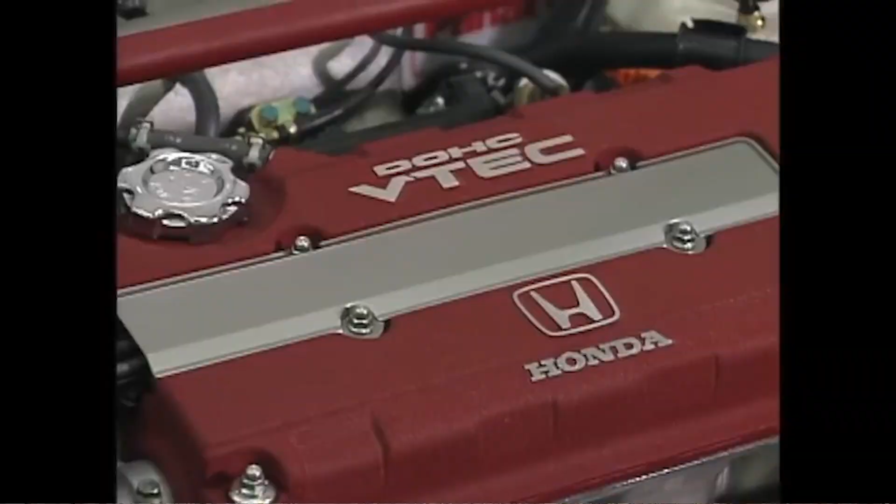The B16B engine is very different from the engine it's based on, the B16A, which is available on the SI and the SIR model.

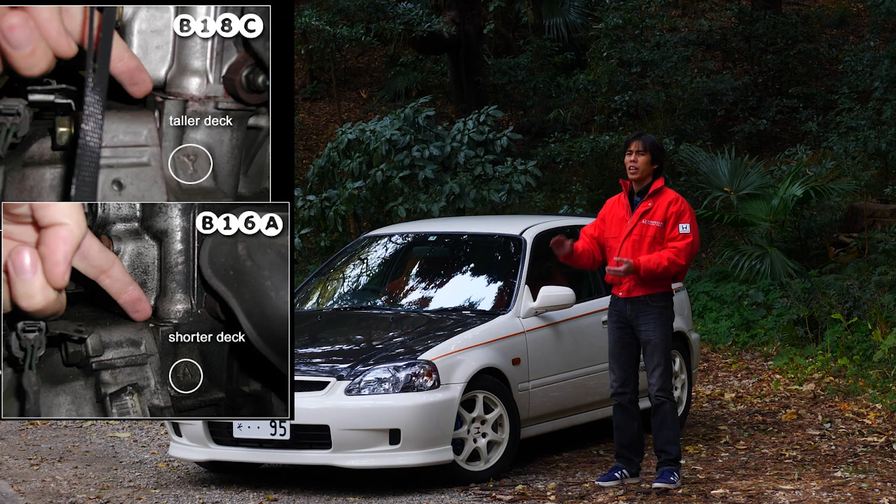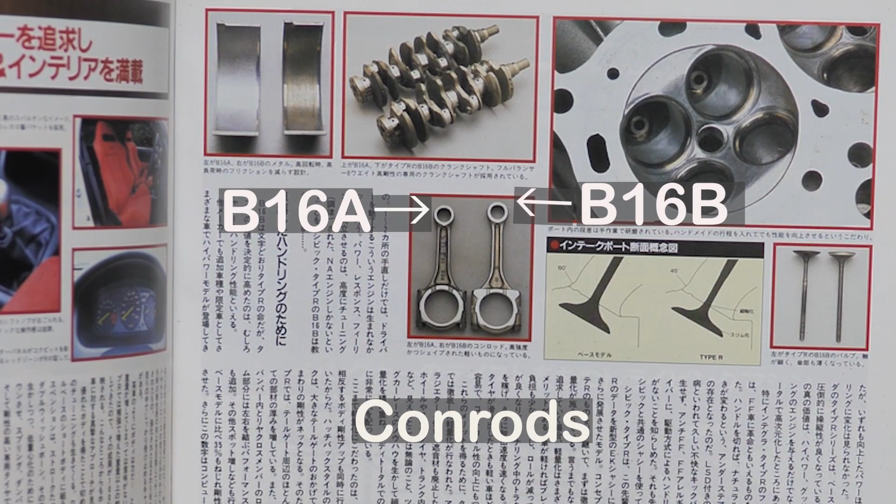The B16B had a high block, taken from the Integra Type R's 1.8-litre B18C, and then sort of de-stroked with longer con rods to make it 1.6 litres. The reason for doing this is having longer con rods with the same stroke actually makes it smoother, with less vibrations.

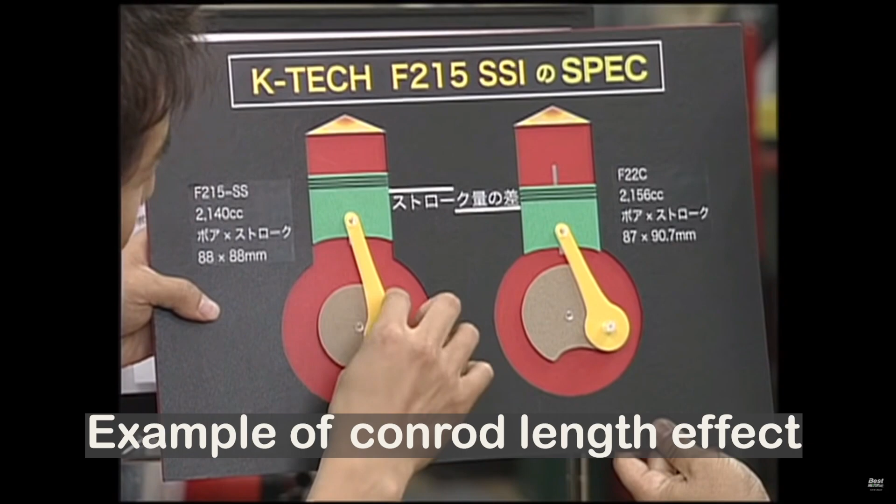Rev capability of this engine can actually go up to about 9,000, although from the factory it's set at about 8,600, which is more than enough. A lot of the power appears in the last 2,000 RPM.

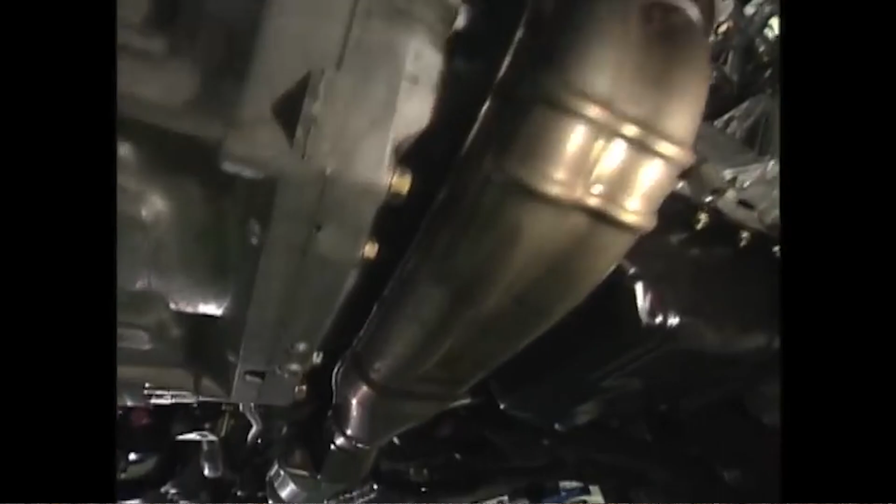But the factory exhaust manifold and the whole exhaust system, and the intakes, are also very different from the SIR model. So a lot of these changes make this engine really bespoke.

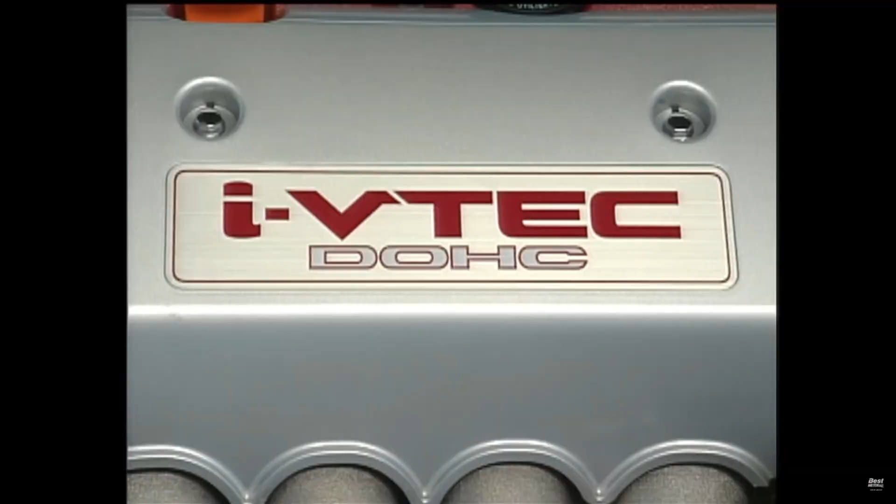It's also the last version of the B-series engines before Honda switched over to the K20A in the DC5 and the EP3. So we're going to be talking a little bit about the technical specifications of the stock car before moving on to why Spoon has chosen to keep more or less the same specs but with an improvement using their parts. So let's have a look at the engine.

Of course, this is the Spoon carbon fiber bonnet, which is very light, 7 kilograms lighter than the stock metal full iron one. In fact, very, very light. Can lift it with one finger, but it's not as light as some other manufacturers' ones, like maybe Varis.

And the reason is it's been constructed with enough rigidity. As you can see here, the top is carbon fiber, but the underside, the ribs, follows the design of the original stock piece, and it's FRP. This is light enough to make an impact on the weight over the front wheels, but it doesn't really need any bonnet pins.

So you can still use this and it'll appear like a normal car. In fact, for those who don't want that carbon fiber look, you can actually paint it to the body color, which is what I would do with the thing.

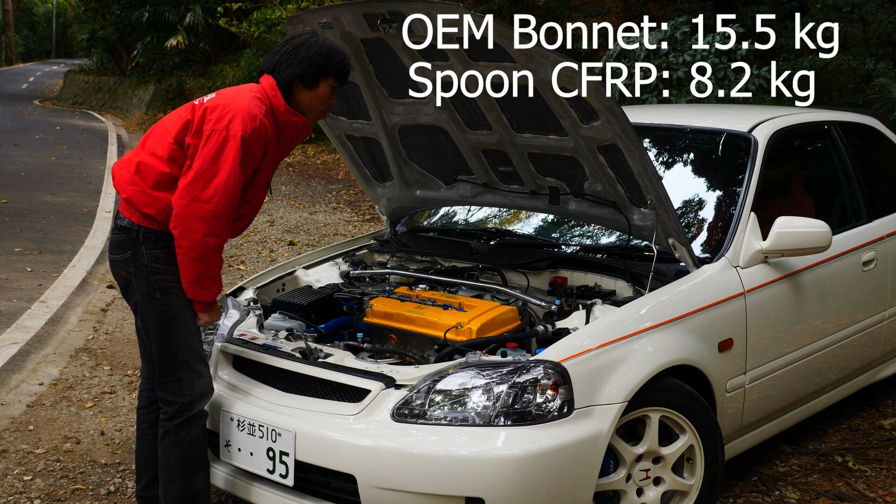So here we have the yellow head, the B16B engine. You can see here DOHC VTEC, which was quite a big thing. In the 90s, it was a thing to put all these technical specs of the car, the 16 valve, 20 valve, DOHC, and of course VTEC. And what is VTEC? Let's explain once more.

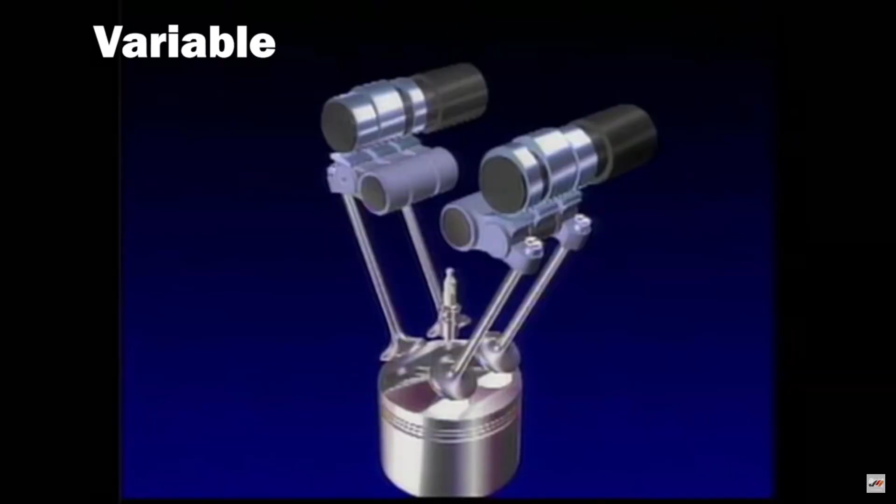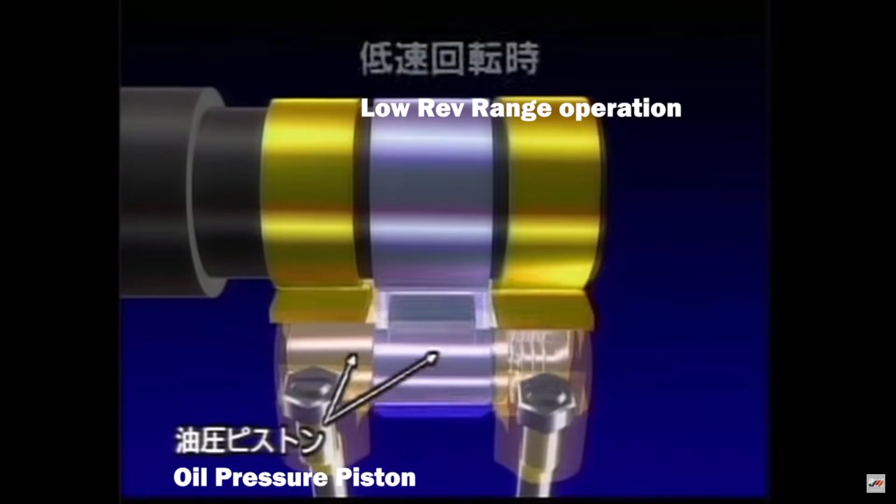Variable valve timing and lift electronic control. This was a revolutionary cam switching technology that Honda patented, coming up with the first DA6 Integra XSI in Japan, followed by the EF9, and then also used it on the C30A in the NSX.

The B16B is the last iteration of the older school VTEC engines before the switch over to iVTEC with the DC5. Users and fans have commented at how the older B series engines, as also the H engines, not forgetting the very, very good F20C in the S2000, because it doesn't have variable cam phasing on the intake shaft, it's just a really on-off kind of Dr. Jekyll and Hyde kind of feel.

It just has linear torque, and after 6,000 or so RPM, it switches to the high cams, and there's just a huge rush of power, just sort of 'VTEC kicked in yo' as a lot of fans would like to say. But it's not really VTEC kicked in, it's more of a switching from the low cam profile to the high cam profile.

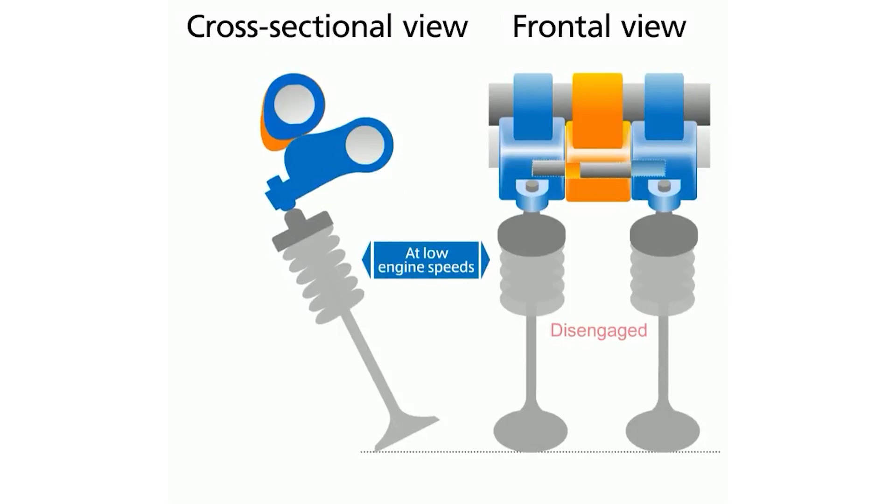Now what this actually entails is that the intake and exhaust valve lift is longer, the duration is longer, to allow more valve overlap. And that's very important because we want the intake air to be overlapped slightly with the exhaust going out.

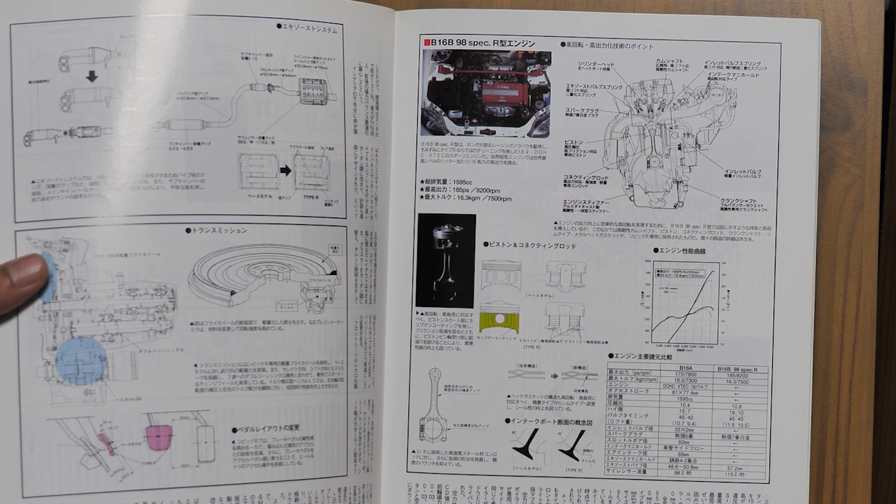And those who know about NA engines, the only way to produce more power is to rev higher and breathe smoother. Now with normal engines, the higher revolutions you go, all the valve train and everything's moving really, really fast. If the cam timing and therefore the valve movement and duration stays the same, you can't put in a lot of air. It's like an athlete - if you're running and you want to increase your pace, to get more air into your body and create more mechanical or physical power, you need to enlarge your lungs.

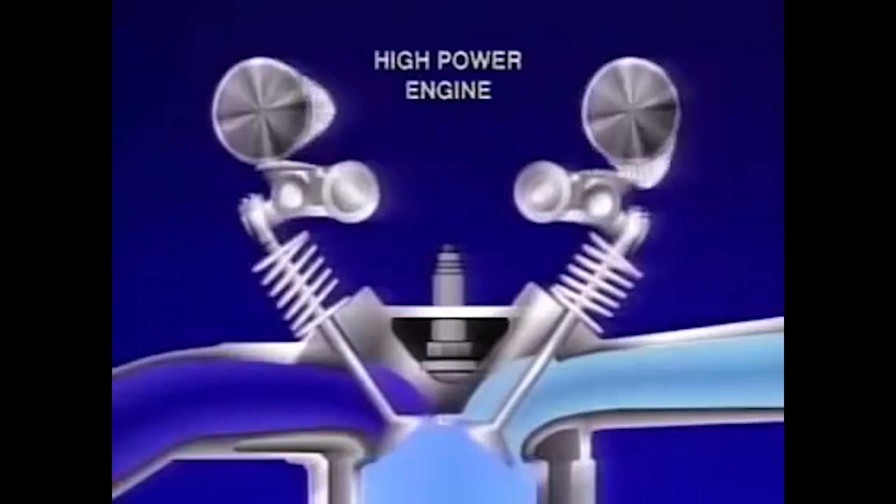So this is essentially what the VTEC system allows. It's created first as a very high revving, high powered NA engine, and then the VTEC mechanism actually helps to give more drivability at low speeds by having a lower cam profile with better fuel economy, so you get a good mix of mid-range torque and also high-end power.

Now, realistically on the circuit, this helps a lot because if you're downshifting from third to second, or maybe from high gear into a low speed corner, the revs do drop maybe below 5,000 RPM. If there was no VTEC, you'll have to keep the gear ratio very short. It actually helps to give some mid-range punch, and then getting out of the corner with some power.

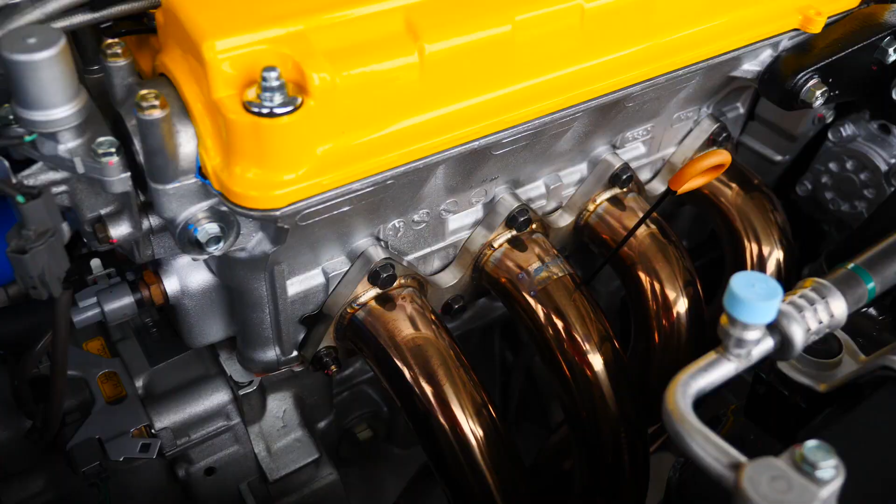Most of the driving you can do around town without actually going past 6,000 RPM. With the tuning done just by bolt-on mods, we have the exhaust manifold and also the exhaust muffler and a bit of intake mods, combined with the very lightweight car, just a little bit past 1,000 kilograms.

Well, this is very true for even the DC2 and the EG6 and EK4. You don't need a lot of power to move the car a lot.

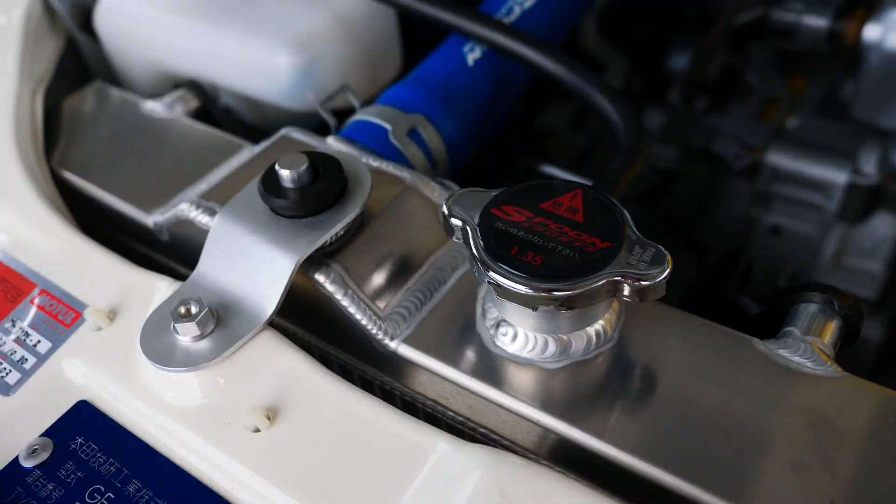So let's talk about the engine tuning that's been done. Just because you can see here, everything is really clean. The body has been repainted and removed of rust. It looks like almost a show car. Every part possible has been changed to new.

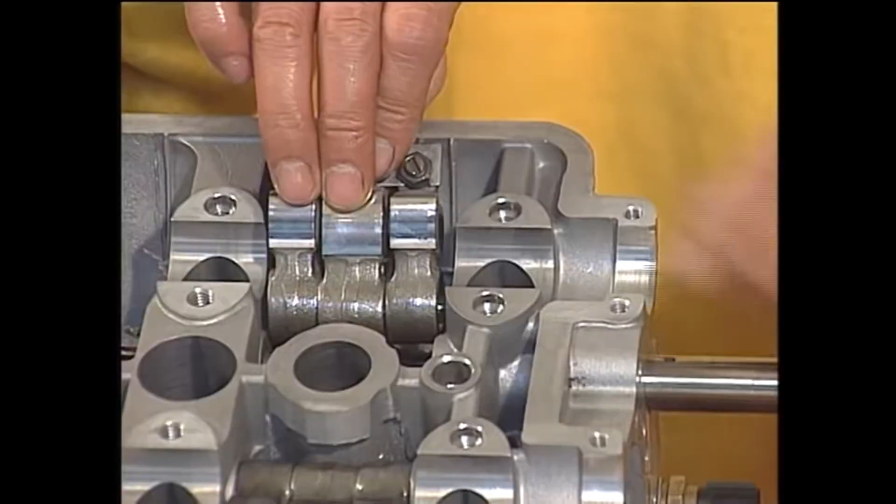For example, all the hoses, the radiator cap here, some little brackets, even the nuts and the bolts, these brackets, power steering, pump fluid, the cable, and every part has been cleaned up or replaced with new OEM parts which are still available. Yellow valve head cover without the crinkle is an iconic Spoon color. Now this engine is not new, it's been overhauled, starting with 180,000 kilometers.

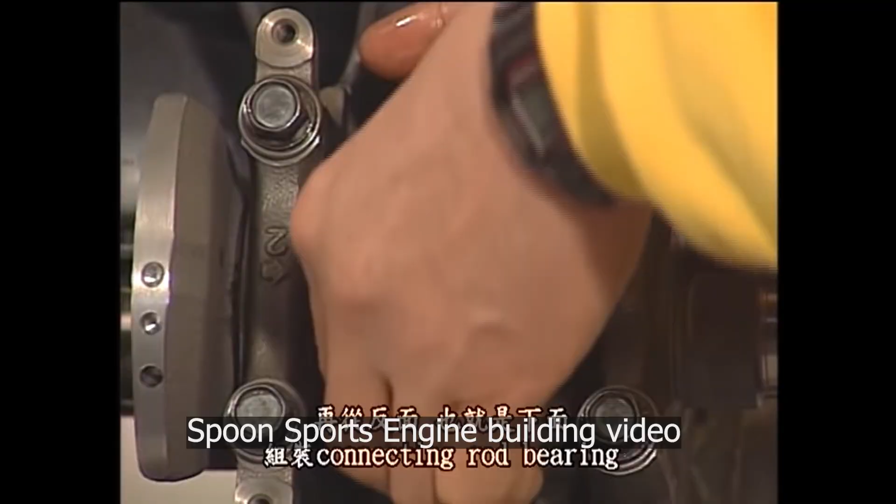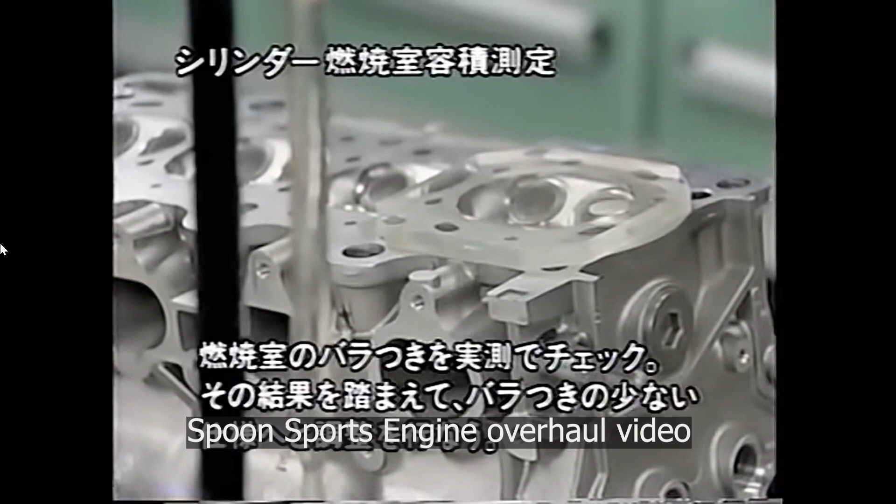Most Honda engines can last way past 200,000, even to 300,000 miles with proper maintenance and good oil. It's built a bit different from other makers' engines, with high tolerances of parts and accuracy in construction and design. It still creates a lot of power, but then why go further and rebuild an engine if it still works? The reason is, what is actually a spoon engine?

Those of you who watch Fast and Furious may know Hector's got 3 spoon engines. Does it make that much power? The answer is, back in the 90s, Spoon did experiment with several types of tunes.

A 1.6 with a stroker kit to 1.8, which essentially makes it the same as a B18C, giving it about 200-plus horsepower, and another kit which is actually a B20 sort of swap with crankshaft and con rods to make it a 2-liter with a lot of high power, 240 at least. The stock B16B on catalog produces 185 PS Japanese horsepower, and the rebuilt engine has no more than that.

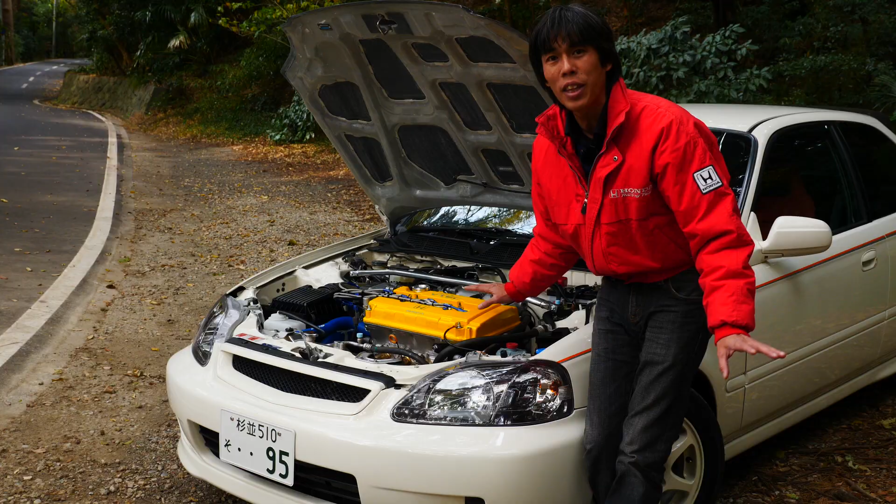So what's the point? Now, let's go into engine building.

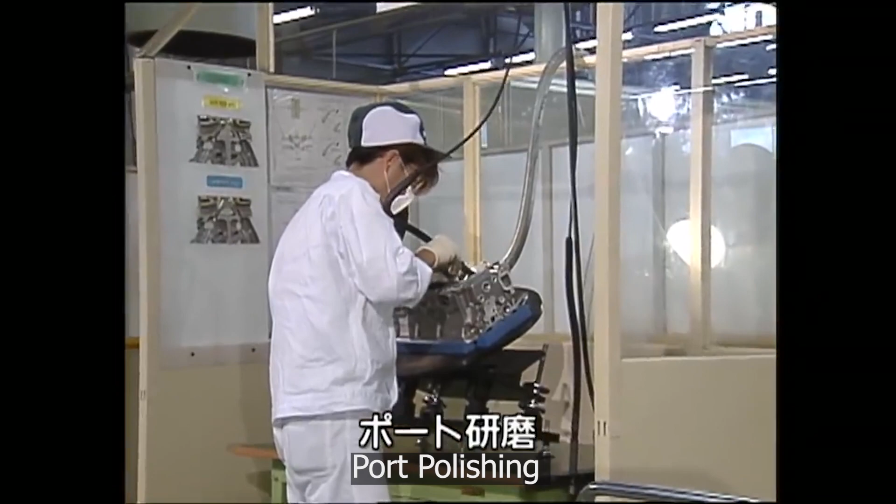The original factory Type R engine, the C30A in the NSX and also the B18C of the DC2, was hand assembled from the factory. In fact, the valve head intake ports were polished and smoothened by skilled technicians in the factory, and they also created a machine to actually replicate this smoothening.

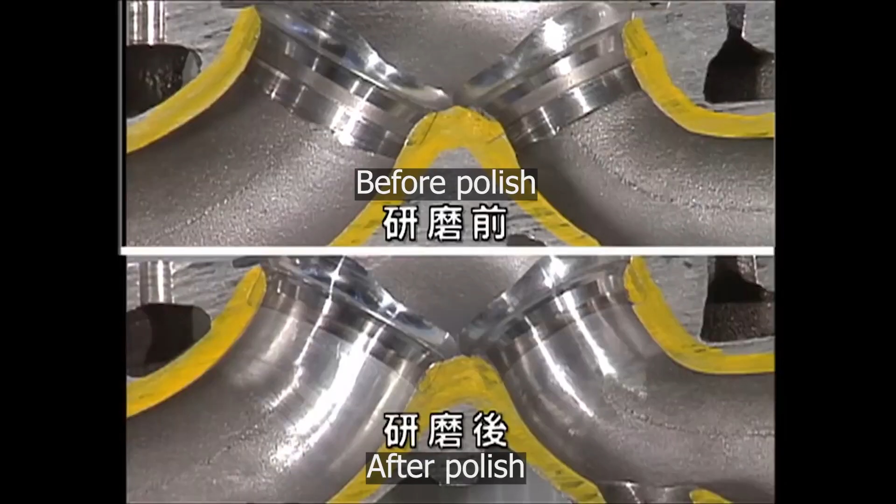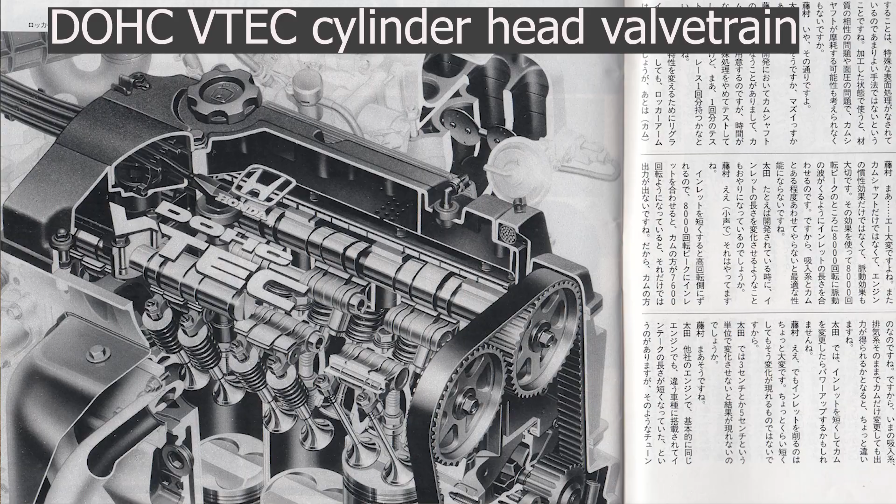Those who know engine engineering well will know that making the ports smoother increases airflow, which matches what an actual racing engine needs. So basically, Honda built the design of the B16 and B18 very much like a racing engine, constructed with all of the parts—pistons, con rods, valve springs—any component with multiple pieces weight-balanced within very close tolerances of each other.

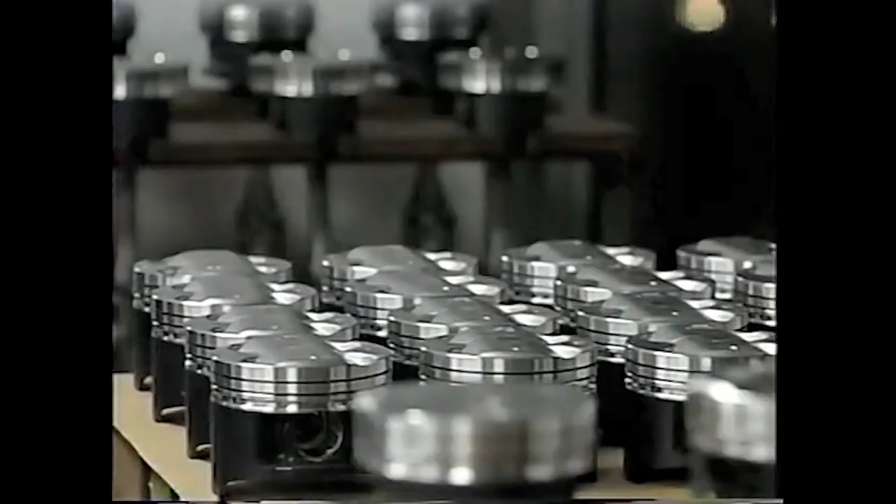According to Jomoto-san from Spoon, he says that Honda already matches the weight of their components down to maybe 1/10 of a gram. Spoon goes further, very much like a racing engine or even an F1 engine, to 1/100 of a gram.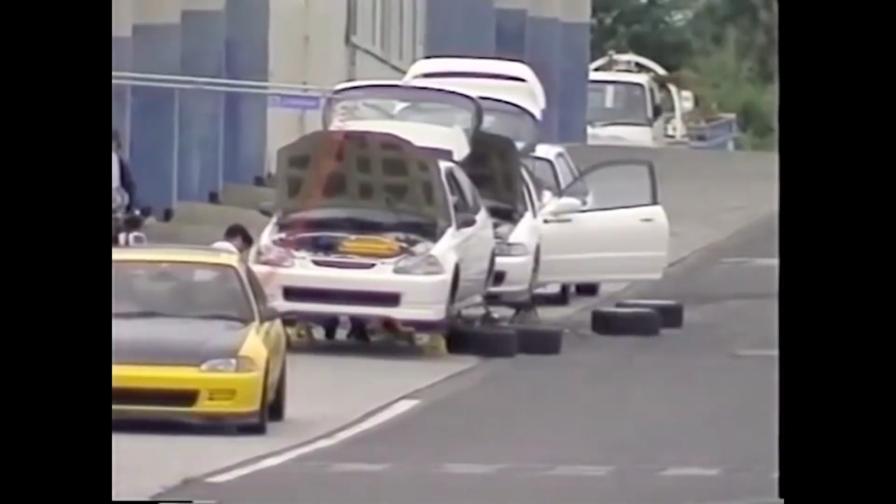The difference means that every moving part becomes much smoother, which increases reliability and longevity. But this is basically the same as a racing engine. So this translates into a very reliable engine that can be used throughout its rev range, and you can use all of the power on the circuit. You'll be safe with the fact that it won't actually break.

Already the stock Honda Type R engine has a very high tolerance capability, but having it more finely tuned and balanced in a Spoon engine—this is what it's all about.

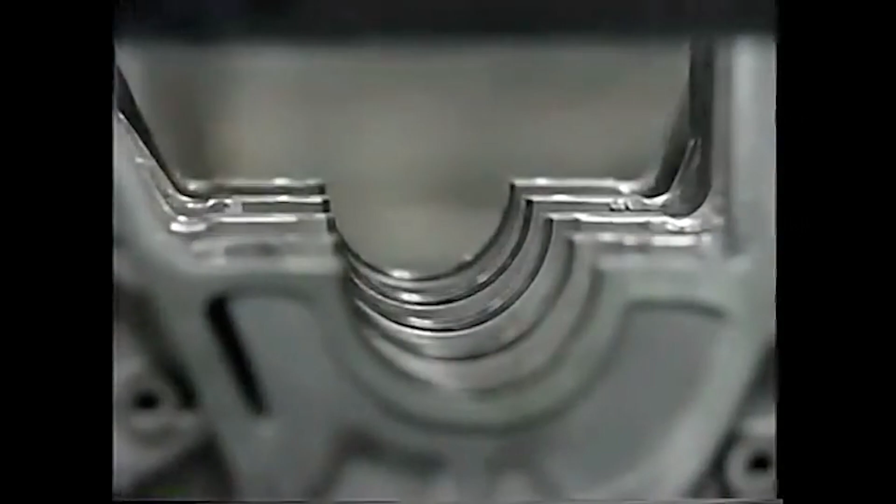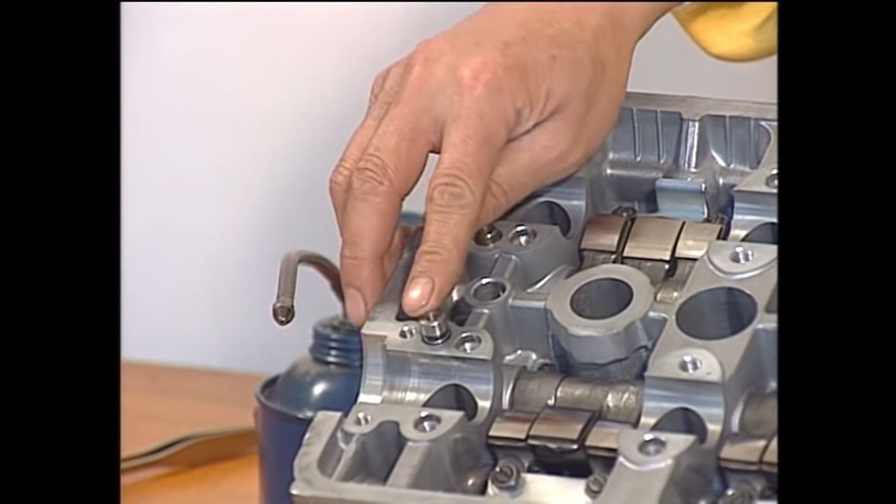It's done in the Type 1 workshop by their very experienced and skilled technician who assembles each part meticulously and slowly. The most difficult components to assemble in a Honda engine, especially with the VTEC, is the complicated valve train. It has several rocker arms and also the solenoid, and runs by oil pressure to do the switching mechanism. There's a lot of complicated parts.

This actually makes it a little bit heavy compared to non-VTEC engines, but in total, it's actually quite light. Now, Honda designed the car without fancy components like aluminium or carbon fiber—this was steel originally, and the bonnet was also steel.

Now it's changed to carbon fiber with other lightened parts, which includes, as you can see here, the stainless steel exhaust manifold, very beautiful in bronze color. This actually cuts weight by about 5 kilograms. So 10 kilograms from the bonnet, 5 kilograms over there.

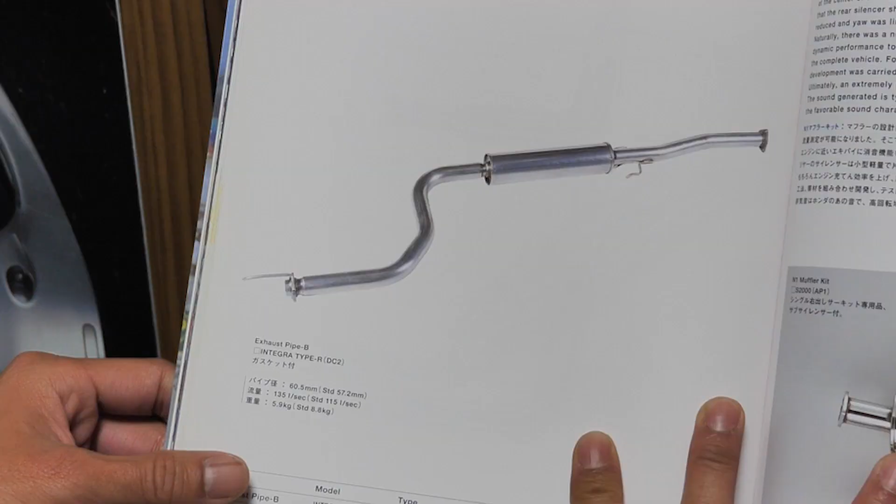The B pipe also cuts about 3 kilograms, the center pipe and muffler cut about another 3 kilograms. Over here we have the carbon Kevlar direct intake pipe, which cuts about 1.5 kilograms by removing the resonator, creating a more direct intake flow.

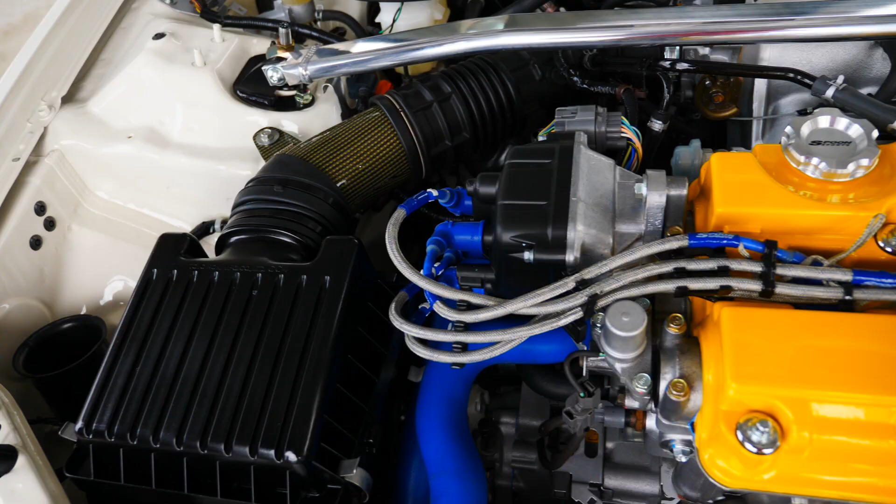So it looks very much like a normal stock engine. Other parts include the increased capacity radiator, which is half size for the EG and the EK. Interesting that it only needs a 1.6 one, but it's been cleaned up.

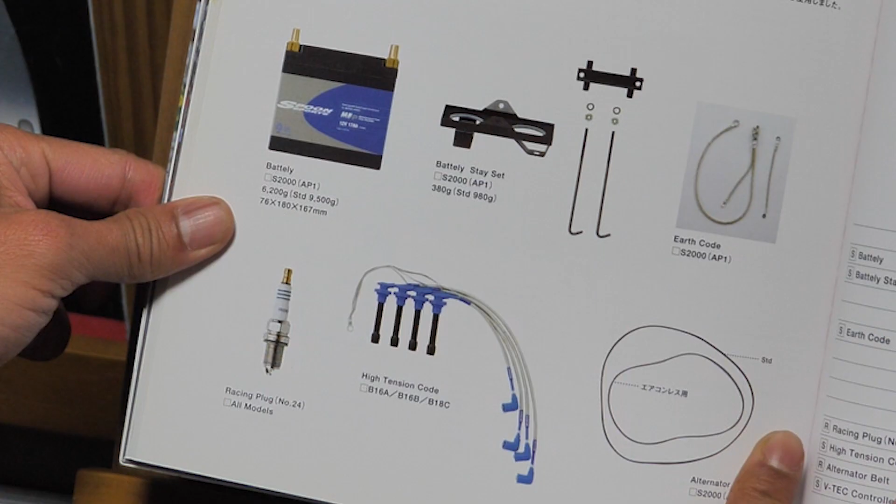And over here we have the strut tower bar, which is not mounted on the original upper wishbone mounts, but because the suspension is a lot stiffer—18 kilograms in the front, 16 kilograms in the rear—mounting it directly on the strut towers makes it a bit more responsive. Also in the rear, there is another bar.

And also in here, we have the air intake, which is just a replacement filter—nothing fancy, no open pod filters. This is a higher flow air filter, which works best with stock cars and also for street running.

It increases fuel economy, which is better because open pod filters do get dirty and it's not really worth it. There's a lot of misconception that an open air filter increases more power. Yes, at the top end if you're in a race car, but in daily driving you need the box, the resonator box, and the filtering capabilities, which is very important for fuel economy and also to give it more torque.

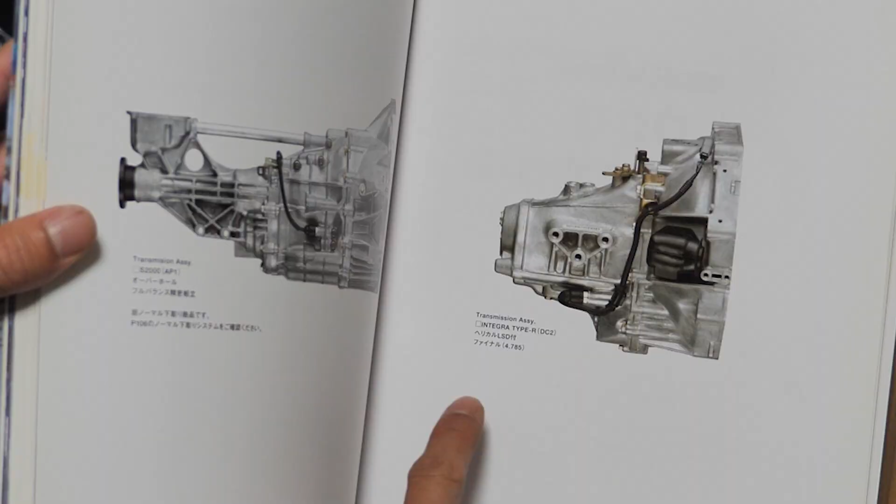Everything's also been cleaned. The gearbox is standard with the standard ratios, 4.4 final drive, same as the EK4. The DC2 98 version had a higher 4.8 final drive. This is still a very good match for the winding roads of Japan and also on the streets. It's an option to change it, but they chose to keep it stock to keep the original specs of the helical LSD, which is strong enough, not necessary for a clutch plate.

The whole concept is to keep this still an improved, tuned road car. Now there's a lot of misconception probably about what tuning is. Let's talk a little bit about tuning.

Now the first objective was to demonstrate that restoring a very popular classic like the Civic Type R is possible in today's age. It doesn't necessarily have to be a Type R model. They're trying to demonstrate that if you have the right thinking about buying an old car, you restore it first to its original condition.

Now, of course, many things like the bushings, for example, even if the car has low mileage, are going to be all cracked up and need to be replaced. Driving on old bushings like in my own Civic Type R, I could feel the immediate difference with everything being restored in this car, how responsive and stable it feels, especially on corner turn-in, and just reactive when you're doing a lane change, accelerating out of the corner, on an uphill on the track.

Restoring it to the original condition allows you to enjoy the car as it came from the factory. A lot of these 90s cars have a lot of R&D money put into them, and it should feel fantastic. Those of you who play Gran Turismo will probably understand the feeling that the cars are really sharp and handle very well.

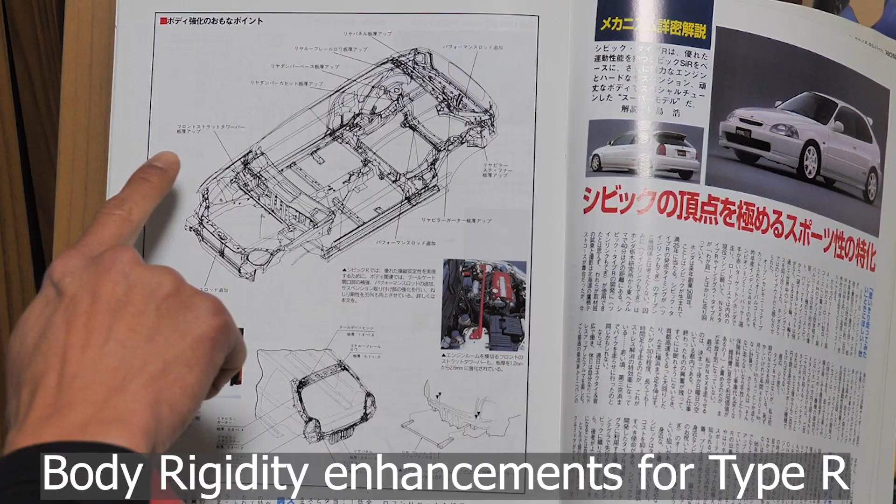The EK9, or the Type R model, very much like the DC2, and in fact any Type R or Euro R models in the Honda range, Honda's gone a step further compared to other manufacturers like Mitsubishi, which does for their Lancer Evolution more spot welding around the door opening area and increasing certain parts as well, like the thickness of key areas such as the strut tower mounts and also the rear tailgate.

So let's have a look at this - the all-important big enclosure of the hatchback, which has an open area. You can see here the rear strut bar, which gives high stability to the rear side as well. This is very important for a high performance car.

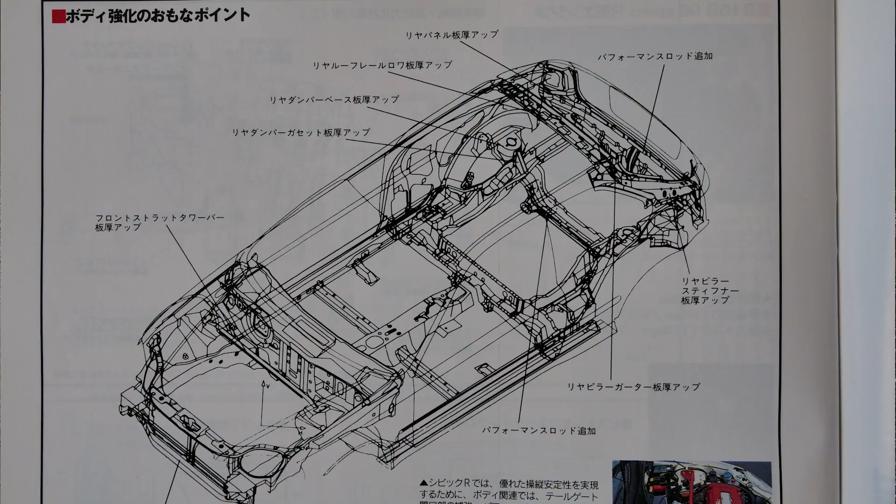More rigidity basically increases the response and handling of any sports car, and this is something done especially for the Type R models. You can see here in the chart all the little areas that have been improved in rigidity. The thickness of certain parts of the rear hatch has been increased from the factory, from the stamping procedure.

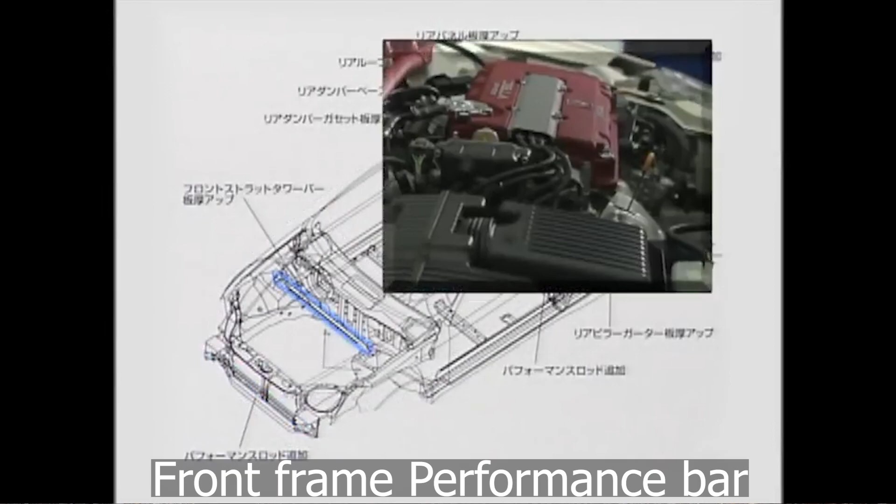Other things like the rear lower arm bar with brackets welded in has been added, and spot welding done to certain key areas and the gusset points in the floor, which is the most important part of the body rigidity increase. This cannot be replicated with a non-Type R model. So that's what makes Type R cars - the body is the most important component.

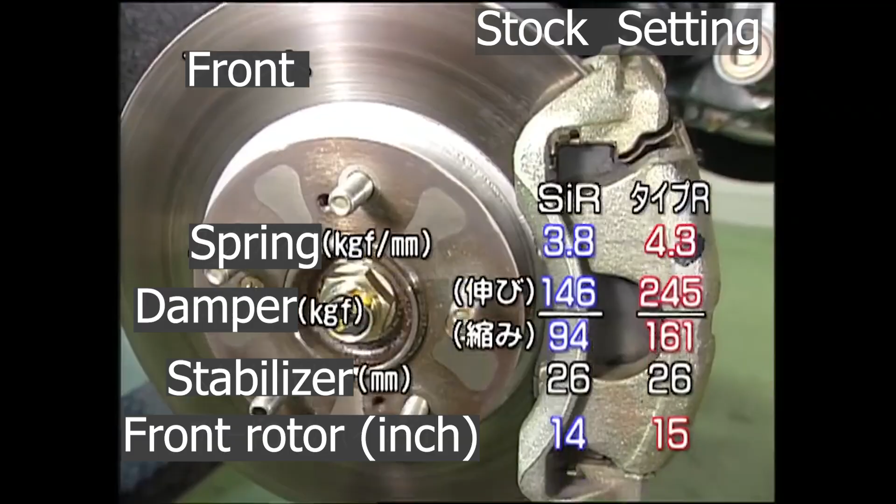Using this as a strong base, it can handle very well even with increased rubber bushings, which is what the Spoon ones are. It's 15% more stiffer than the already stiff Type R bushings, but it doesn't give any vibration feelings compared to maybe more hardcore ones like the N1 versions of Mugen. It's a sort of a good balance for very sharp sports driving.

Think of this like a Porsche 911 GT3, which is equivalent to the normal factory Type R, and the RS, GT3 RS - this is what the Spoon version is.

So for any of you who want to do car restoration, whether you have a real Type R EK9 model or DC2, or even lower end models, putting these parts available from their catalog, refreshing the car in the right way to bring it back to original condition, and then putting selected parts from any manufacturer you want, will give better performance and you can enjoy.

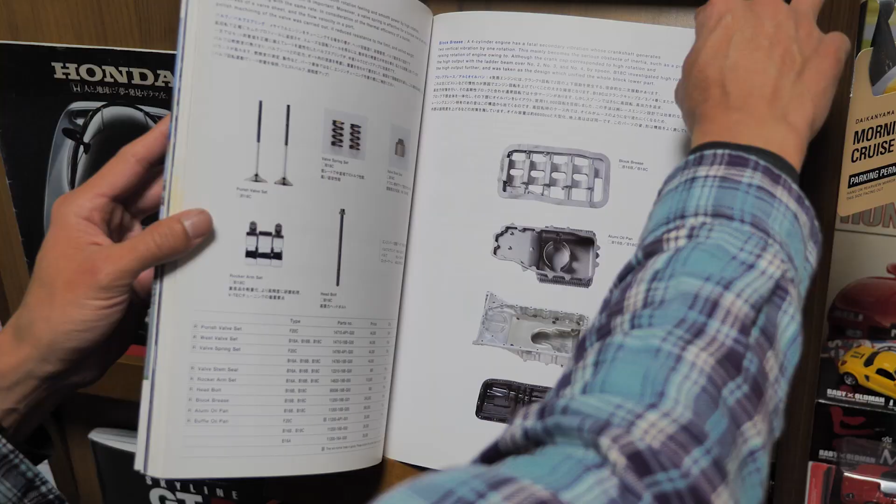It's not about having a lot of power, it's about selecting the best balance between parts, and a lot of this comes from careful selection of chassis parts. The bushing is where you should start, because this will actually give feedback from stiffer springs or dampers in the settings, and even alignments - more accuracy, and you can really feel it through the steering.

So we're going to go for a short drive and I'll give you some impressions of it.

That's the kind of response you want from a lightweight body combined with a very sharp, high revving NA engine, and perhaps in the JDM world, in the 1.6 litre NA class, probably nothing can really match the Honda B16A and B16B.

Combined with just the double wishbone suspension and the restored bushings, it really feels more like a new car and beyond. I tested the EK9 and the DC2 when it was new in the late 90s - this feels very much like that as far as my memory serves me.

Compared to my own car, which needs new parts, it just feels 30%, 40% better.

Sound, of course, is a little gruffier with the street exhaust. It's not too loud, not too intrusive, and this is still very livable on an everyday basis compared to the N1 exhaust or any loud, straight through cat delete.

You don't need that, because that can still intrude into just trotting the car around, and you'll disturb your neighbors, which is not a very mature thing to do when you own one of these sports cars. It kind of has like a bad boy racing image, but this is a more mature take on it - enjoying the car as it is designed from the factory.

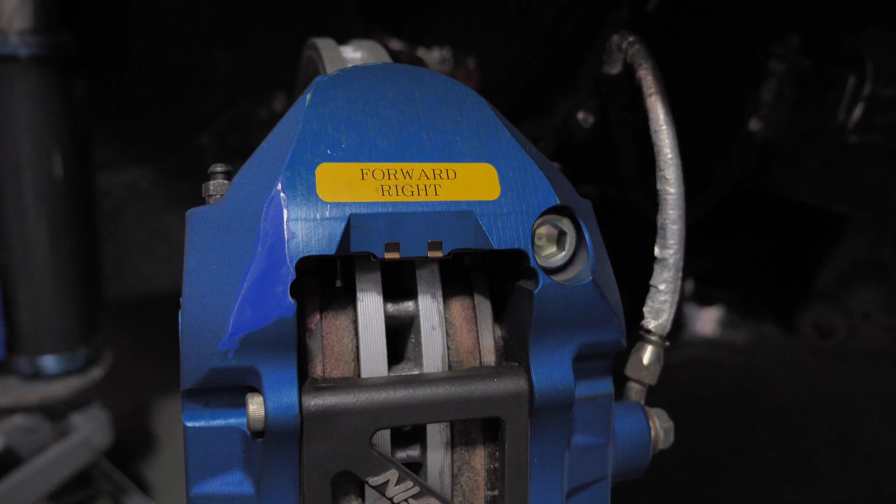We have fans out there who have 20-year-old 90s cars. I said to the viewers, it's okay, it's not a Type R. Maybe people in Europe or in Asia have the EK4, EG6, or maybe EK3, but they love these cars. They want to restore, and I think Type 1 and Spoon make a very, very good example.

If you get your car done at Type 1, it's, for me and a lot of viewers who love JDM tuning and Spoon, the finest tuning thing. But maybe 80% or 90% is possible. Really? Yeah, what's the method?

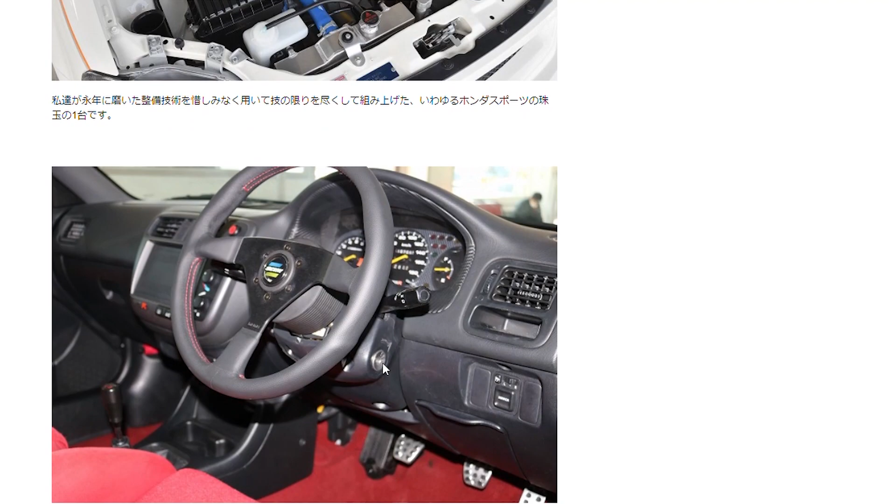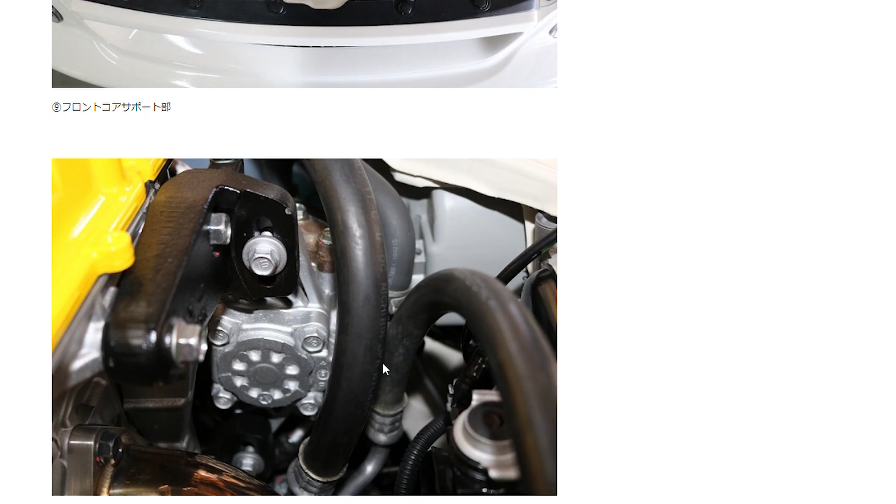We only change the parts, but we check all the condition. Good condition, don't change, I see. And if it has damage, we will change or repair it. So we have some experience, so we can judge good or bad.

Now, this is not the first renovation car that Type 1 has done. In fact, if you check their website and blog, it's all in Japanese, but you can just click on the word renovation car and you'll see many different cars. We did a review of a Honda Accord CL7 Euro R in a previous episode, and that was also a renovation car.

But this is special for me because the EK9 Civic Type R is a legend, and you have the full rebuild engine. Oh man, so I'm gonna make my car like this—possible? Yeah, of course.